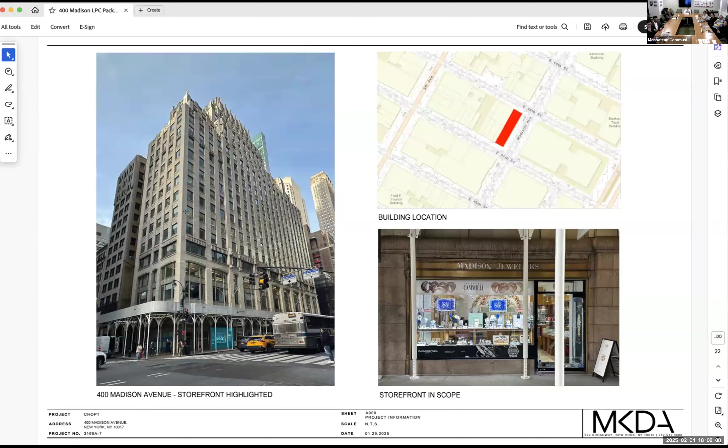Great, so as was introduced, this is an item regarding 400 Madison, which is an individual landmark. It was designated in 2016. You can see the landmark on the left. It is a 21-story neo-Gothic skyscraper designed by H. Craig Severance in 1928 to 29.

And the application is to replace one storefront bay, which is located here. And this is the subject bay that we'll be talking about tonight. This is a view of the building. Unfortunately, it's under scaffolding now, but this is from the designation report in 2016. The work here is proposed for a new tenant that's going to occupy the 3 bays that are highlighted here, on the south side of the building, between 47th and 48th Street, on the west side of the street. And right now it's 2 retail spaces, and it's going to be combined into a single space.

Prior to designation, most of the historic storefronts were replaced. There are 3 storefronts that have historic remnants of bronze surrounds in the storefront bays, including the one that we're going to be looking at today. So here is the proposal, the existing conditions on the top, proposed conditions on the bottom.

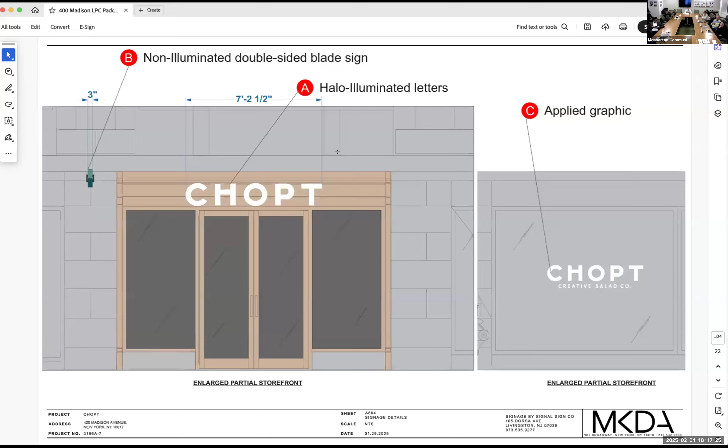The new bracket sign is going to be located below the bullnose. Let me look back quickly to show you that the storefronts are actually really compressed by this bullnose cornice. You can see it here. The base is 5 stories, but the storefronts are this very low condition marked by the projecting granite bullnose at the top.

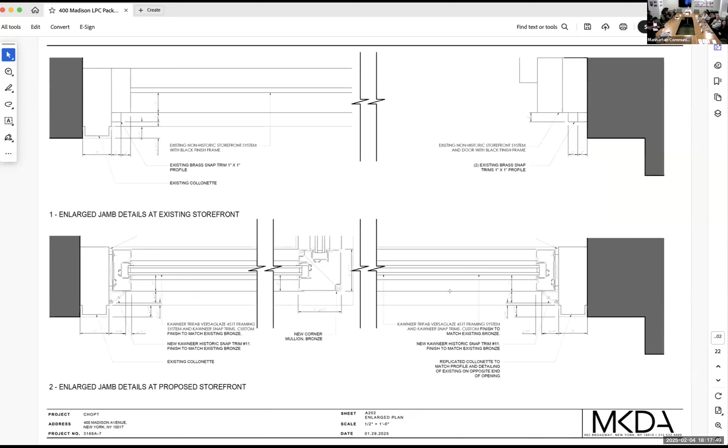There's a requirement that the bottom of the sign has to be 10 feet above the sidewalk level, so to achieve that, the sign has to be right under the bullnose. The bracket is designed to engage right below the bullnose, and it would be a round metal bracket sign. The face would be metal and the letters are raised acrylic. It projects 18 inches, the maximum allowable, and is 15 inches in diameter, sitting below the bullnose.

It's the combination of those two signage elements that are part of the hearing scope of work. That is it, and I'm happy to answer any questions you might have. Thank you very much. Questions from the committee?

Michael asked, what's a bullnose? A bullnose is... a nose of a bull? No? Oh, on the granite, here you go, this element here. That one thing, it's one large piece of projecting granite. Let me go to the detail for you, here you go, this gives you a better idea, it goes from here to here. That's a bullnose. Who'd have thunk?

Barbara asked about the signage on the restored metal top, confirming that's adhesively applied. So it doesn't have to penetrate there, though just to be clear, there are penetrations in the lower panel. Let's go back to the detail.

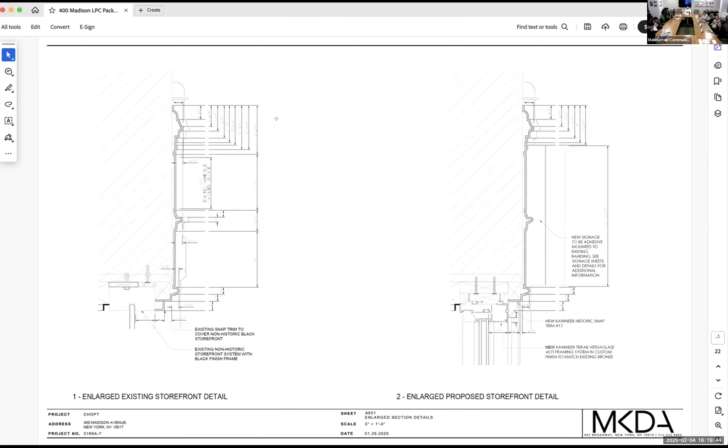Because they're halo lit, they need a low voltage connection, so there's going to be one penetration per letter. It's right here, but it's coming through that non-historic cover that's over the awning pocket. Let me show you that.

Right here, this is the filler panel, and this is what was the original sign band. Can we clear that box? Okay, there you go. You can see this is in a recessed plane with a different finish than this. So this is where we think this is the historic awning pocket that has been covered over. The penetrations will all come through this panel, but no penetrations through this.

So you're saying that bottom panel is not historic? Not historic. Do you know when it was put in? No.

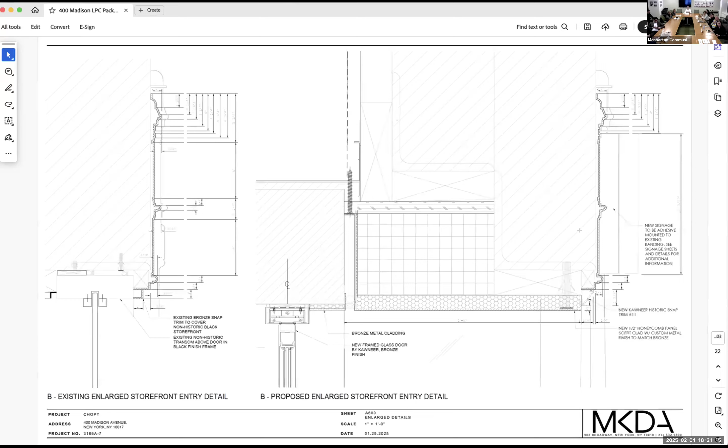And the signs span both pieces. And that middle piece protrudes, so they're gonna cut the back of the sign. There you go, you can see it's kind of hard to see here. This is shaded gray, and then between the dotted line and that molded piece, it's narrow there.

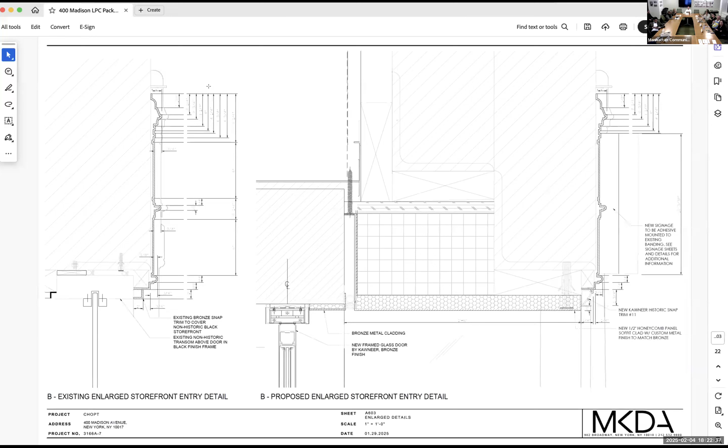The bronze surround needs to be cleaned. The overall storefront condition, every bay is kind of different because they all have contemporary storefronts. In here you can see all the dirt running down the building, so the historic bronze is soiled. In order to get a good match, we're gonna need to clean a sample and match that, and that's the intent, the plan.

And the product that you're using, you feel like it will match that and be able to retain that and not look new as the rest of everything else patinas and changes? We think it'll be a good match and it'll be consistent, because if you look back at Street View, the bronze storefronts were so bright 10 years ago. So I think it's really a function of maintenance, and as long as the storefront is maintained, it should all be consistent going forward.

And I think part of that is also tenant driven. As new tenants come in, especially something like Chopt that has a pretty distinct identity, they'll be maintaining the storefronts in a different way than perhaps what's happened over time.

And that metal, that aluminum, is just a great deal cheaper, is that why, versus replacing it with bronze? But the finish is gonna be a custom finish to match, so it's not a stock finish. That's the system they're proposing, this Kawneer system, will have the ability to be finished with any... it just doesn't age. It doesn't, you're right. Okay, thank you.

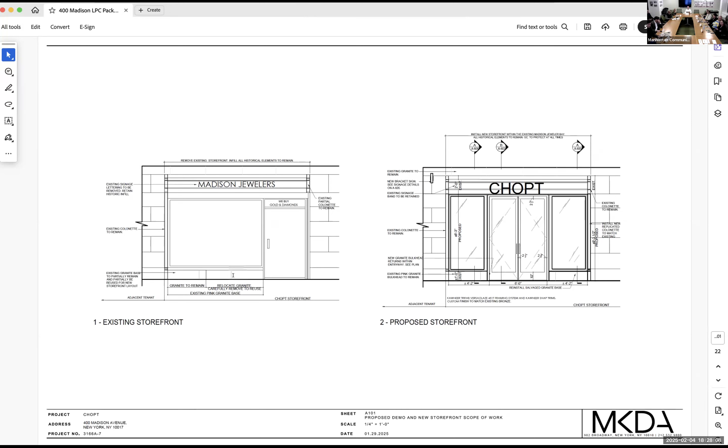In terms of the signage though, 18 inches applies to two different things. Right, I think that's the source of my confusion. So you can project 18 inches from the property line, and signage under landmarks staff rules is allowed to be 18 inches in height. Correct. And the proposed signage is 15. Okay, got it, all right.

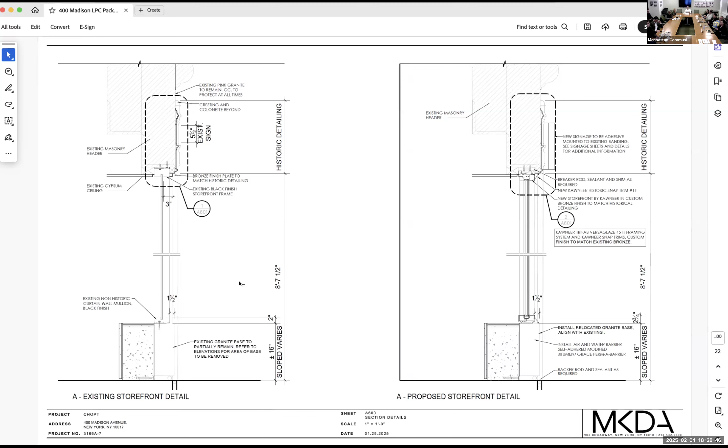Another question—what impact will this have on any original fabric? Nothing, all the historic fabric is being retained. It's actually being improved, because we're restoring and replicating the pilaster at the north end of the bay, bringing it more consistent with the historic condition. The only modification is to salvage and reinstall the granite bulkhead. So the existing granite bulkhead you see here is going to be retained, and when the doors are inserted in the center of the bay, half of it will go to the south and half to the north, in the returns.

Thank you. Suzanne? Sorry, she's beating a dead horse, but only because I don't know the answer. Bringing up this bronze again, sorry—we appreciate all the historic fabric that you're preserving and replicating, that's such great news to us. But I can't really see that well from here, and if you showed this already, I'm sorry—are the other storefronts, have they also replaced the bronze? Is it all metal now, and you guys are sort of the last of the bronze?

I didn't know what the criteria was, there was no master plan. There are 3 storefronts out of 11. The ones highlighted in blue have a bronze surround that remains—everything else is entirely gone. So this is our bay, and then there are these 2. These both have a sign band, just a single panel, and colonnettes or pilasters, but the bulkheads have been removed because all the infill is contemporary.

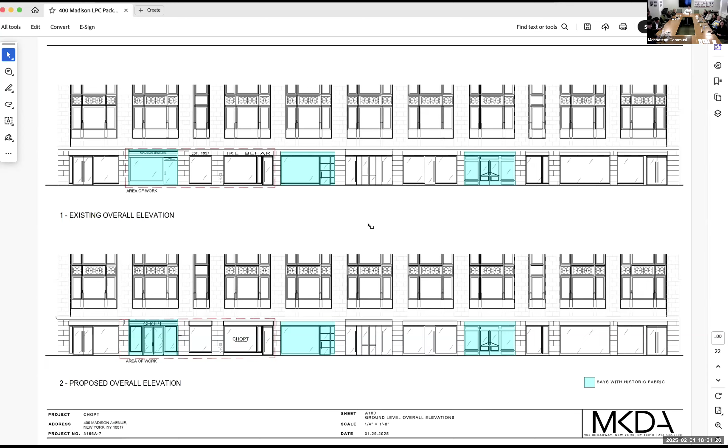This is more of an ignorant question about policy in general, since we haven't seen a storefront in a while and there haven't been flags and stuff. What can LPC staff just check at the storefront level, and what are the things that more need the commission to really look at this when it comes to a community board? And what elements are here?

Because it's an individual landmark, there aren't rules staff can't really approve anything on. Which is kind of an unfortunate situation for a single storefront. Because of some of the unique conditions, the location of the signs, that bracket sign being close to the bullnose, and the signage on the sign band straddling both of the panels, staff has included those. They can approve signage at staff level, but because even though these signs meet all of their criteria, the way they're being located and installed on the building is what's bringing it to hearing level. But the storefront itself, you can't replace a storefront in an individual landmark at staff level.

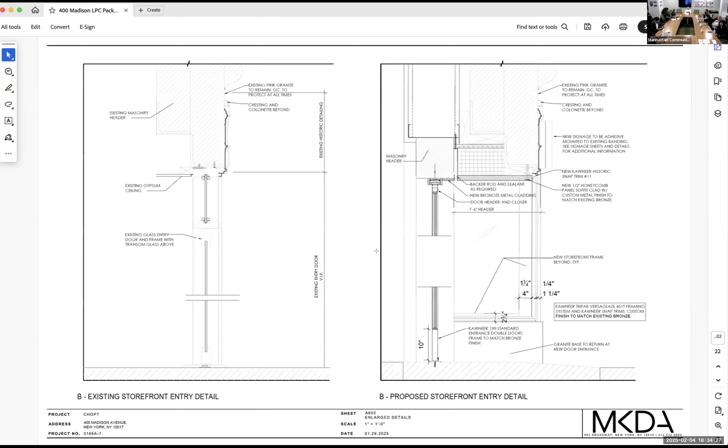Can you zoom in, does it work on your screen? Oh, no. Back up. The share button, the green one. I'm trying to get it, but it's not working. Okay.

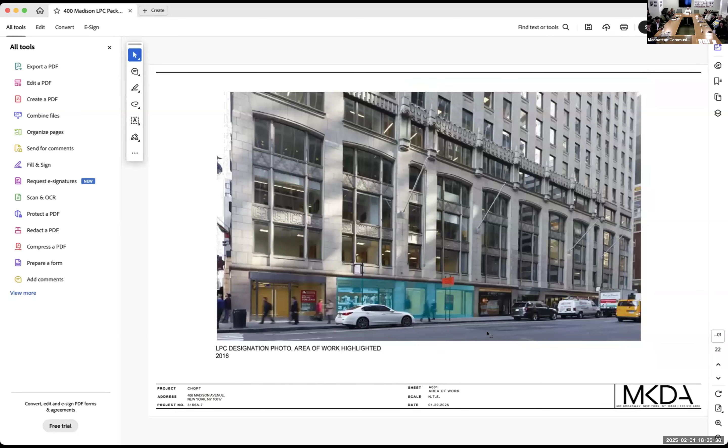Just a little bit about the design of it, how far it sticks out of the window, how high it is above the ground, what it's made out of, stuff like that. Okay, so it's 10 feet above, the bottom of the sign is 10 feet above the sidewalk. That's the minimum requirement, and that places it right below the bullnose. And the sign is 15 inches in diameter, and it projects 18 inches.

The whole building is shown. I'm not seeing anything, it's even hard to see. I don't know, it's hard to see. You can look on my screen and see perhaps. Is that better? It looks different on my screen. What am I looking at? This? No, this. Oh, this? Yep. And where's the sign? Is that word Chopt the sign? Oh, it's a circular sign. First time I ever saw a circular sign that was a blade sign. Okay, that's why I missed it. I got it now.

So it's 10 feet above the ground, and it's 15 inches in diameter because it's a circle. And how thick is it? It is 2 inches thick, with 3 inches to the raised letters. It's got raised letters that are an inch above the 2-inch plane, half an inch on each side. Okay, thank you. And the color is blue with green letters.

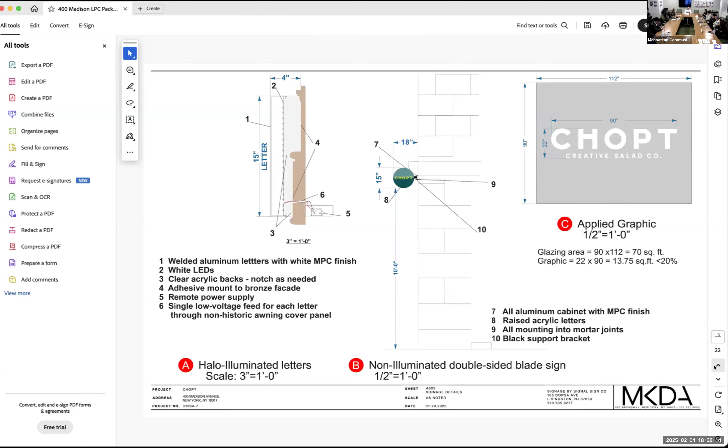First thoughts, anyone? I guess it was helpful to hear how they thought about not penetrating any of the historic fabric, not removing any historic fabric. The sign lighting is halo lit, just the edges. It looks contextual with the other storefronts, and it seems like this is coming to us because of the location of the sign and also because it's an individual landmark. So for me, hearing the rationale and then seeing the visuals, it's contextual, and I'd be for the changes they're proposing.

No one else? Barbara? I'm okay with this. Yeah, it's worth it. It's fine.

Okay, fine. Do we have a motion? I just was gonna say, motion to approve? Yeah, we can approve it. I'm okay, not thrilled, but I'm not gonna deny it.

Right, nothing dramatic here. Friendly amendment, if we can make a motion to approve -- a little louder please, can't hear that -- if we can add to our resolution a comment suggesting they have a storefront master plan as part of the approval.

Definitely, this building needs it. Just add that included in the resolution, you mean? Yes. We recommend that the owner of the building file a master plan, so all storefronts don't come to us piecemeal in the future. It made sense what she said, that it was only designated in 2016, and this is the first one, and that's why all those other storefronts that were stainless steel were uniform, but they must have predated 2016. So as each retail tenant rolls over, it would be really nice to see it consistent.

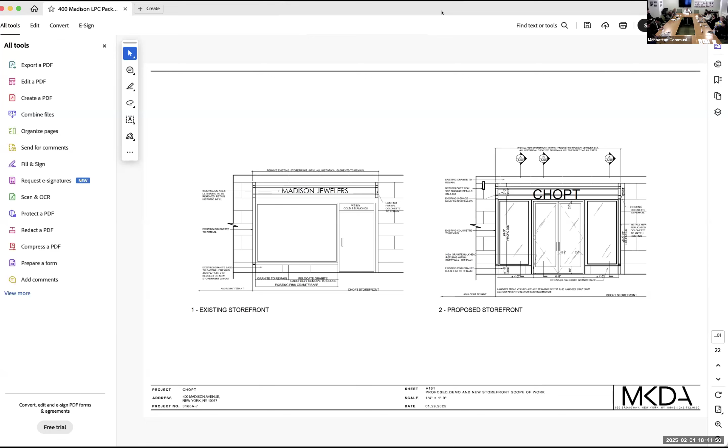Yes. Milan? Yes. Neil, virtually? Yes. Karen? Yes. Dave, virtually? Yes. Barbara? Yes. Peter? Yes. Sachi? Yes. And Justine? Yes. Okay, motion passes.

I'm also a yes. Oh sorry, Donna, I forgot -- all you're good. Motion still passes. Thank you to the applicant.

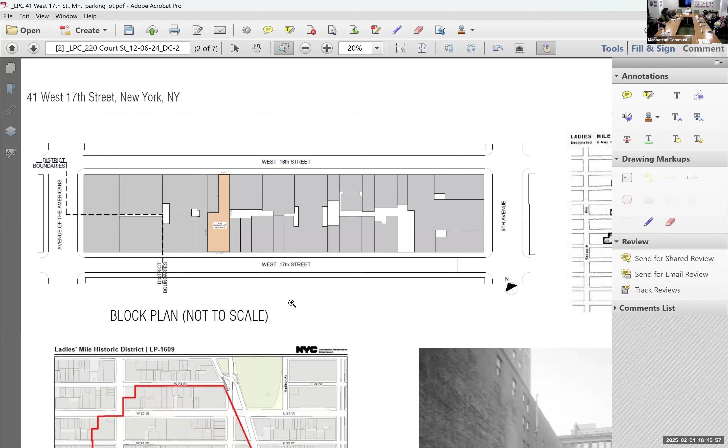It's a through lot, from West 17th Street to West 18th Street, and it falls into the western third, or the western half of the block. It falls within the Ladies Mile historic district. Last year, the parking lot had 10 parking lifts installed on the property. The contractor that installed it for them advised they did not need permits, but then they consulted us and they actually do need permits from the Department of Buildings, which entails us to file with Landmarks. That's why we're here tonight.

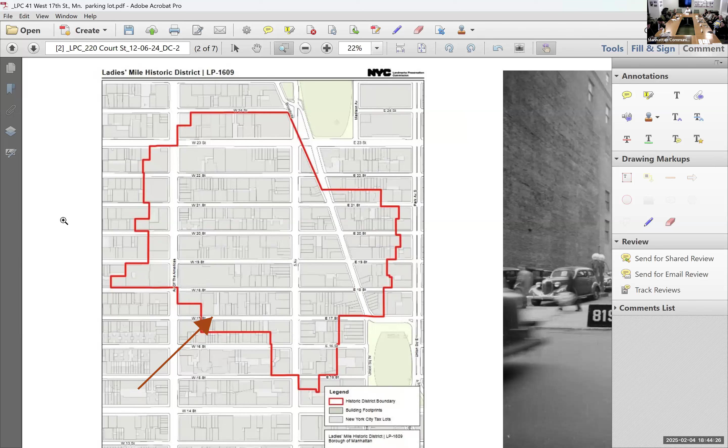These are two pictures, one historic from the 1940s, and that's a current photo. All the stackers are on the left side of the property, coming in from 17th Street, except for one double stacker on the right side. They're all double stackers and do not require additional foundations underneath them.

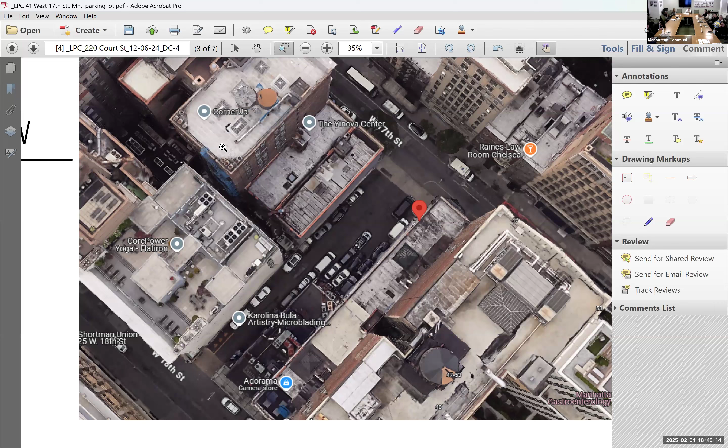That's an aerial photo of the property showing that it is a through lot, but that's an older aerial photo before they had installed the stackers. The stackers were installed mid-summer of 2024.

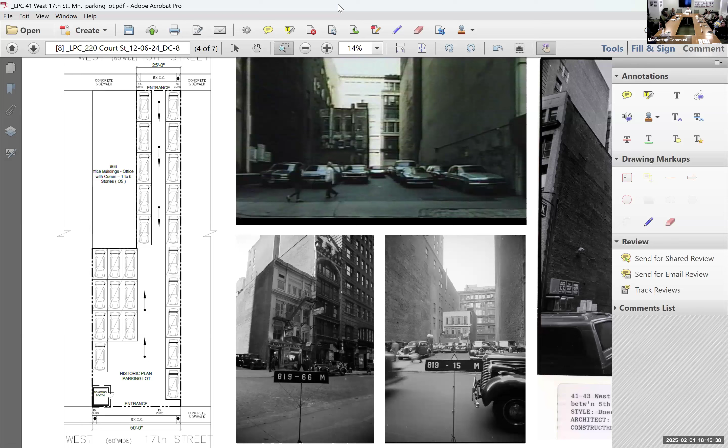These are more pictures of the property, and from these pictures we were able to create a pre-lifts plan showing how it was marked on the plan on the left side. Then we had the proposed plan. The rear section, which goes through to 18th Street, did not change. It's the front section on 17th Street that gets the line of stackers on the left side and one stacker on the right side in front of the attendant booth.

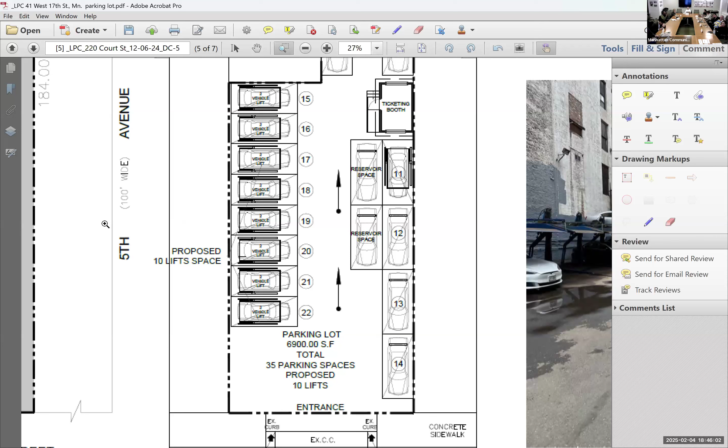That's pretty much all of it. Thank you very much. Questions from the committee? Michael?

So you're applying for permission to do something that's already done? We're legalizing them at this point. Is there a plan to add any more to the existing ones? No, just what's done is done.

Roger: Can you say again who gave the advice that a permit was not needed? The contractor that brought in the lifts, where they bought them from, installed them, and then consulted with us after the fact. We got onto the project sometime in late July or August of last year, and that's when we started the whole process.

Who is 'we'? I'm the architect on this project applying with landmarks. So your job, they hired you to get it approved? Yes, they consulted us asking if we need permits for these, since they were already installed. And you've worked with Landmarks Commission before? Yes, I'm familiar with that. Thank you.

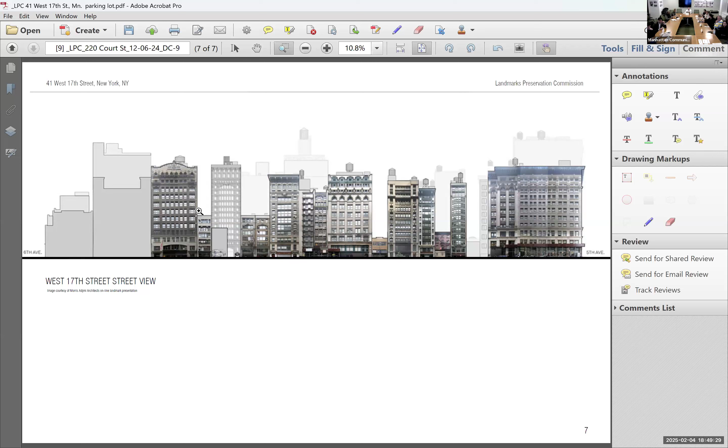Actually, I'm sorry, I didn't have this initially - this was from a previous landmark application that we were able to get, it's on their website. They supplied us this, and we had depicted the way the parking lot sits in the middle. It's still the same vacant land, we just put in our lifts and the single on the right side.

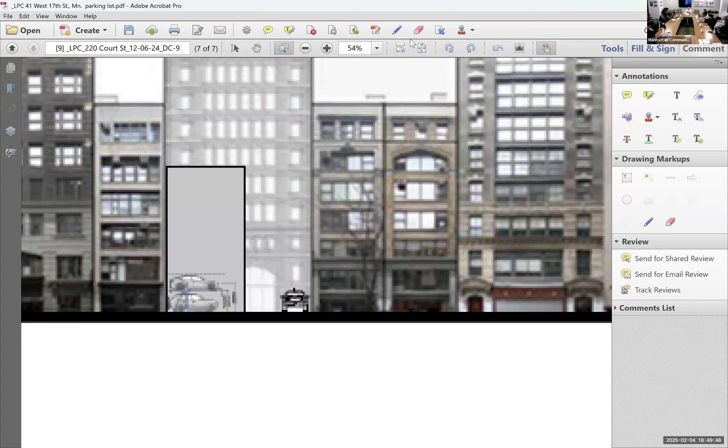But that's it. What was the date again on the old photo you showed - is it from the forties? 1940s. There are a couple we're not sure of the date, like this one - I'm not exactly sure what it is, it looks like 70s or 80s maybe. But these two on the bottom are from the 40s.

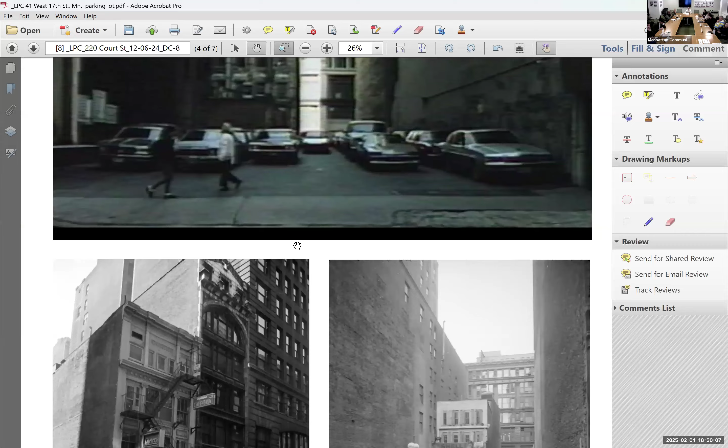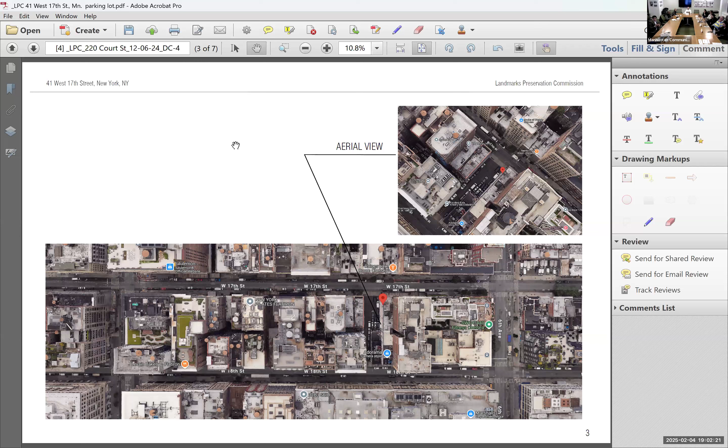That ends questions. Any comments from members? One more question, just out of curiosity — do you have the dimensions of the lot? From a quick search online, the lot is actually 6,900 square feet, which would only allow 34 and a half, not 48.

So we're proposing 10 lifts, divided by 200. The 10 lifts would consume 153 square feet per lift, multiplied by 10 gives 1,530 square feet. Subtracting that from the 6,900 gives 5,370. We take that 5,370 and divide it over 200. That gives 26, plus 20 for the lifts because I have top and bottom at 153 each. I get 46.85, so it rounds to 47. That's why I said 47 or 48, but it's actually 47.

The area of the lifts carries 2 cars but counts only for 153. The remainder, the single-spaced units, counts for 200. So we end up with a total of 47 maximum. Whatever we provide, even triple stacker lifts, we'll still end up with 47 max — you release more spaces from the ground up.

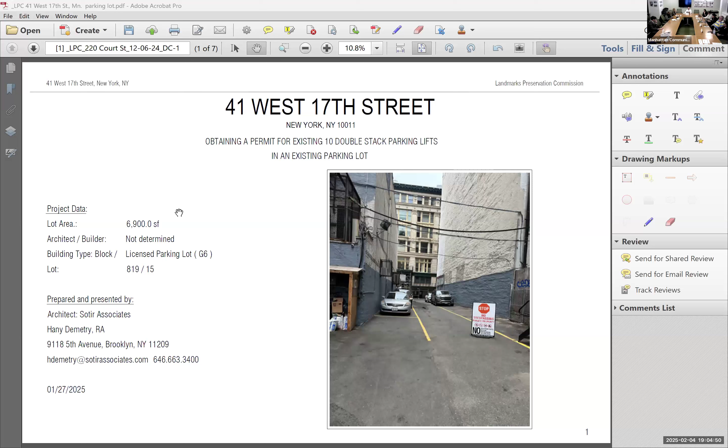Is there anybody from the public on? There's no one. That's fine. So we'll skip public comment and go into business session. Just a reminder, during business session only members of the committee can speak — please direct your comments to the chair.

First thoughts? John, I think you had an interesting way of thinking about it, sort of a two-step process. First, in terms of approving, is it appropriate? Versus a traditional landmark type approval. Right, I think that's the question we have to answer.

No, go ahead. I'll go after you. I guess I would think about what else in the area looks like that. Is it any less appropriate than having just a bunch of cars there, as opposed to the stack and everything? And then, of course, those would be the two issues.

I guess we did ask the applicant if there were any similar structures in the area — not sure we got clarity on that answer. I'm a little torn; it seems like most people are falling into that camp. Part of me says it's been a parking lot for 60, 70 years — it's such a difficult lot size to develop, and who knows if it will ever be profitable or viable to develop there.

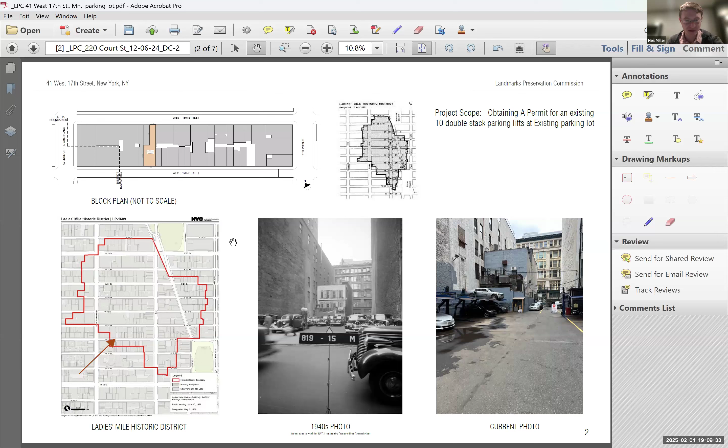John, did you have? Yeah, sorry, we're in comment. So another issue I need to weigh is how permanent these structures are. I didn't ask that question. We should have. Are they attached to anything, or are they just sitting there? If they're easily removable, then it's easier for me to vote for this.

No, they're not attached to anything and they do not require foundations underneath them. They just sit on the asphalt blacktop. And they're connected to each other because they are controlled by one pump unit that lifts them up and down based on demand.

I mean, you see the JP Morgan building, they disassembled an existing building and are building a new skyscraper on top of it. I have to imagine if somebody wanted to actually build an apartment building, they can get rid of it.

I didn't spend enough time on it, and I'm happy to follow up with everybody, but I did see something in the public record where this lot and one or two next to it had an air rights kind of agreement between them. It seemed like they combined, or tried to combine, the air rights from some of the neighboring parcels, so I do think they could eventually develop on it, at least per the public record, but I'm not sure what the issue is. To John's question, I don't think these stackers are impeding whatever further development might happen.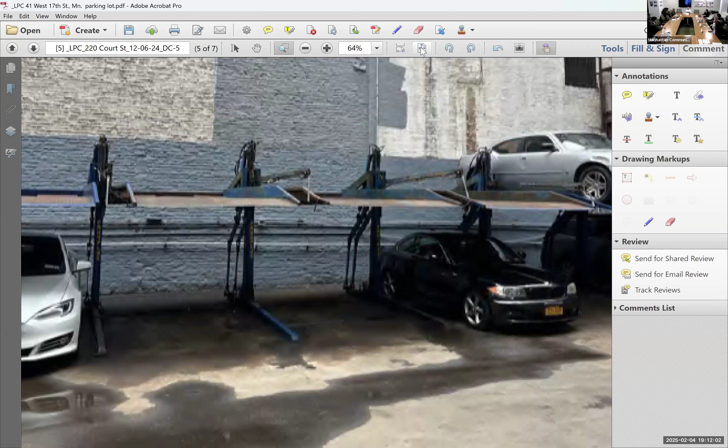So that's one question. And then second is the question that they're kind of taking this out of order. So, to Suzanne's point, are we approving this? Are we kind of condoning this behavior, so to speak?

So this is gonna be tricky how we write this. Are we willing to write it and say we would have approved this under our landmarks community board view of the world, but for the fact that they did this - not consciously did it on purpose, but didn't do the proper steps - so we deny it?

I think it's helpful to take a look at it regardless of whether it's existing or proposed - just look at it, if they were proposing this as new, what would we vote? I don't really think it should weigh in very much that they're there already. Or at least, how would the committee feel if they weren't there, and then we could say how does it change your decision, the fact that they're already there and there's some investment?

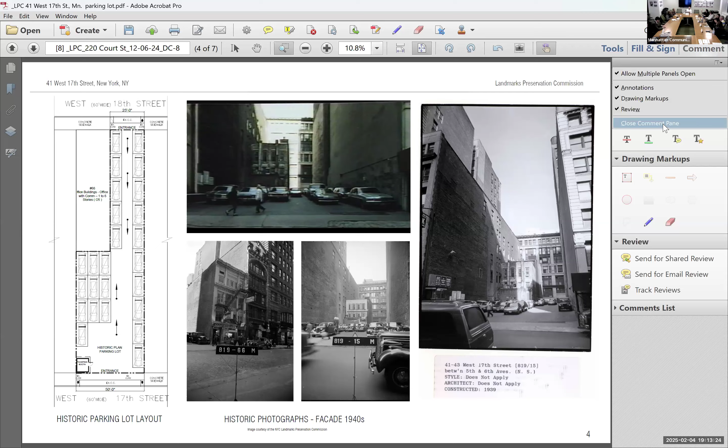Okay, so let's assume that they weren't already there. How do we feel about this just from a pure traditional landmarks perspective? Are we all generally okay with this? Do we know if there's any landmarks guidance on this?

I mean, I think it goes back to our traditional version of just, is it appropriate for the area? That's the right question. This seems straightforward to me, you guys are the experts, but it's been a parking lot since forever - it's not really looking all that different than what it did even in the forties.

I think it's fine, but should we do a show of hands, pick one way or the other, so we have this as a tentative vote? Do a tentative vote, show of hands if you're in favor of them.

Okay, quick show of hands, who would approve this if they weren't already there? If this were just a regular application? So, four, seven - you got Neil too, and Neil, Dave. Okay, so I would approve it, just barely.

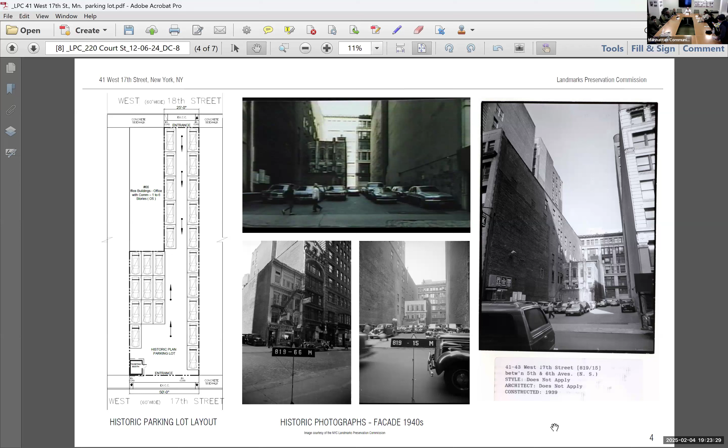Yeah, that's great, because this would have been great to hear from the neighborhood on this one - they really swayed us.

There were postings that went up, but because of timing we didn't assign committee members to do it until 2 days ago - that's probably my fault ultimately. Are we knocking on doors and going into residential lobbies and giving them to the doormen, or are we just posting? Common practice is just to post them - we have copies of the flyer in the folder, but it's just to post on poles or buildings nearby. But again because of the time frame, I don't think Dave went to the location and scattered them out.

But yes, that is a good reminder and certainly best practice that we should do, especially if we find one that might be confrontational - this was just kind of an off one, a bizarre one, really - that we are extra diligent.

Getting the community to speak up, yes. You know, what do the ladies feel about this? They're like, oh, we've hated them, or we love them.

I'm honestly curious how the business is doing now that congestion pricing is in. I suppose all parking lots are having a tough time right now. Although lately I've seen the traffic on Second Avenue pick up just a little bit more.

Canal Street is a totally different street now. It's remarkable, it's actually worked. It's insane how different Canal Street is.